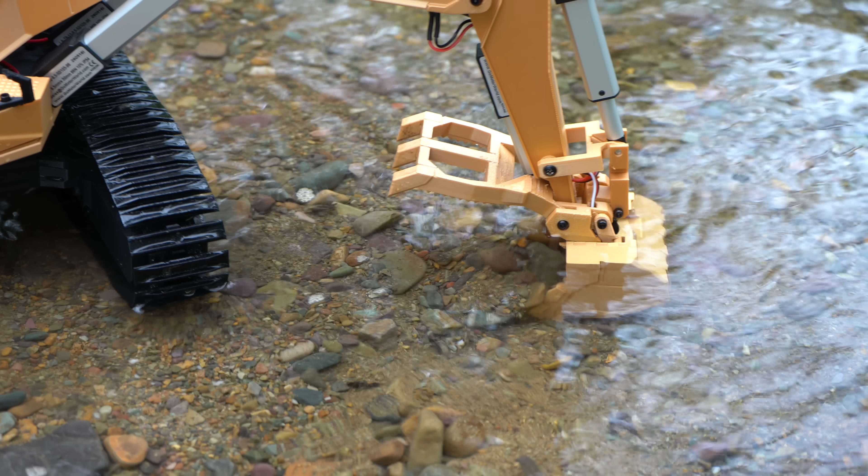This is a 3D printed RC excavator, and not only can it dredge up rocks out of the creek behind your house, load your nephew's dump truck, or construct this perfect Jenga block tower, but most impressive of all is that it can entertain 3 fully grown men for hours on end.

A big part of that, and what makes this excavator so unique, is that it doesn't just have a bucket, which by itself pretty much only lets you scoop up loose material. Instead, it also has a fully independent thumb, which unlocks the ability to pick anything and everything up. If that's not enough, you can automatically detach from the bucket and reattach to this ripper completely hands-free.

Even better is that those attachments can have their own motors and functions, like this claw, which after being coupled to can spin and clamp.

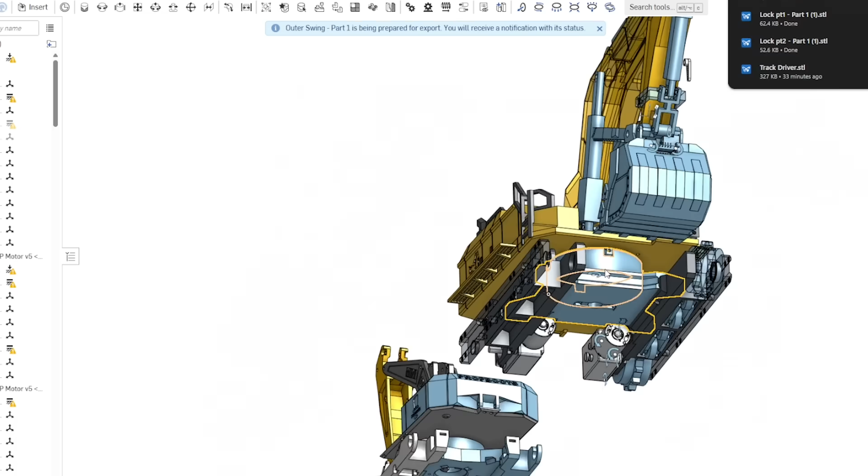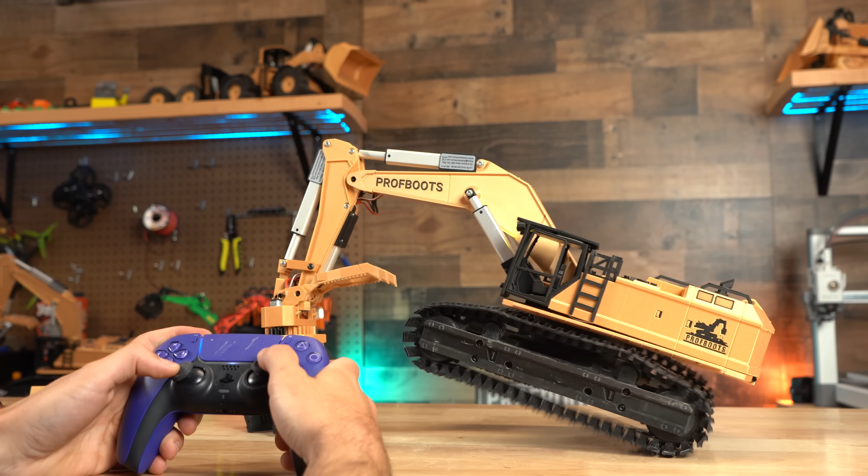Now, I've spent months designing and iterating this to be as robust as possible, with the hope of making the ultimate beach toy for my family. But what really separates this project is that for the first time on this channel, not only is there a robotic style version controlled by a PlayStation or Xbox controller, but also one that can be built and controlled with traditional RC parts.

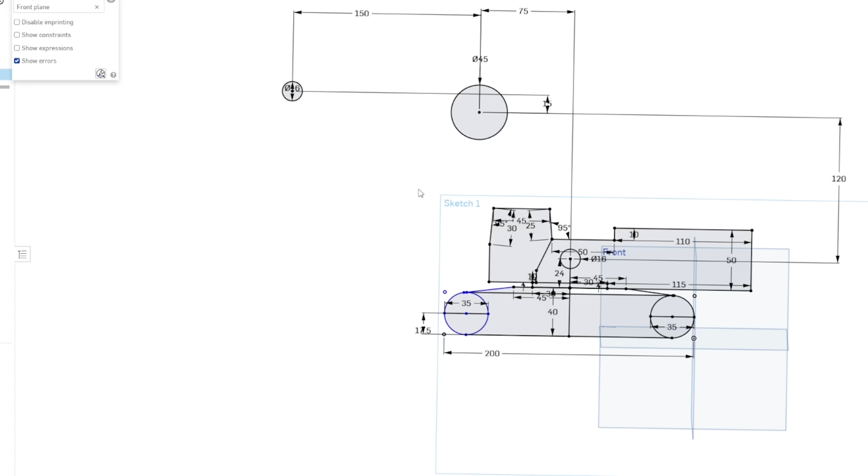Kicking this project off, I laid down a 2D sketch of what I want this excavator to look like. Usually, I really take my time during this step, sometimes stretching it out over 2 to 3 days, but for this case, I had a pretty good idea in mind on what I wanted this to look like. Basically, just a large mining class excavator like the Cat 395 or Komatsu PC 900.

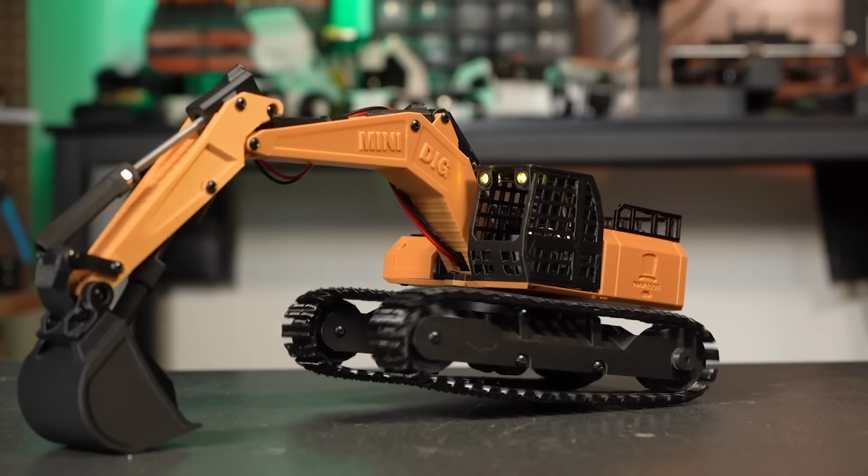The reason for these references is, let's say my original RC excavator was around the size of a Cat 320, well, I want this new one to be much heavier duty, which to me places it right in that Cat 395 spot. The reason I chose a bigger excavator for the next project is because I wanted one that could be used outside in the sand and dirt.

Now don't get me wrong, you can use this smaller excavator outside, but I really only designed it for indoor desk use. Driving it in the sand will eat away at the N20 motors as they're all completely exposed to the elements. This leads me to requirement number 1 for this project: all of the motors need to be completely enclosed so as to not let any dirt or grime in.

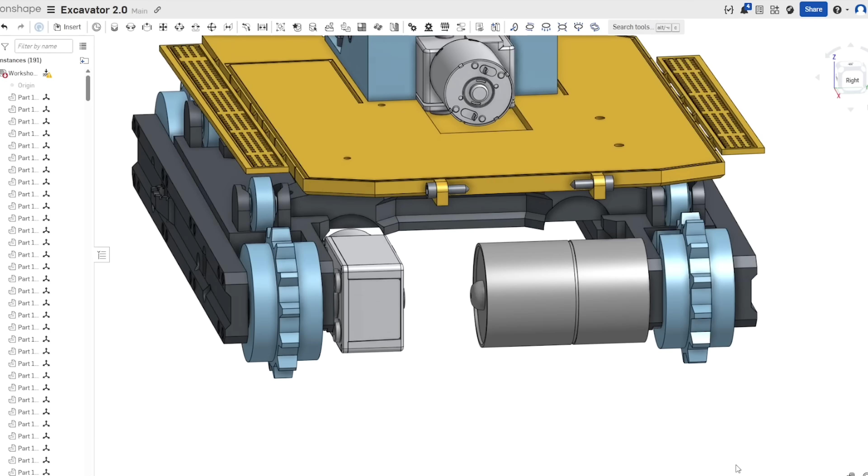For the tracks, I've decided to go with these 12-volt right angle motors as I did a bunch of virtual testing, and while the motors I used in the dozer are more efficient, the diameter is just a bit too large to feasibly fit in the tracks. They just stick out way too far.

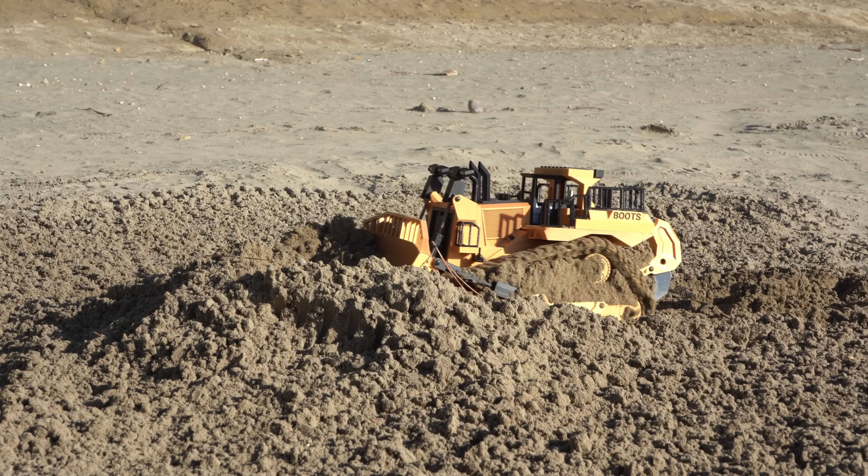These will still provide more than enough power for the excavator, as most of its utility comes from the arm versus the dozer, where literally all of its utility is being able to push and move heavy things via the track motors.

After nudging and pulling at all the different proportions of the original sketch, I finally got it to a place I was happy with. So I cloned that one sketch a half dozen times, separating it out into all of its core components, such as the body, cab, boom, dipper, etc.

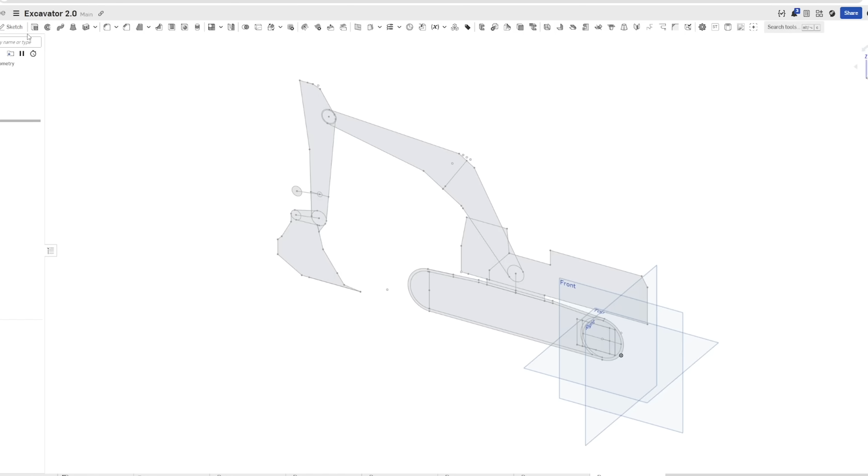I found that just jumping to this extrusion step early on really helps me tune out any weird proportions that might mess me up later. It also lets you mock up all the motors and push rods immediately so that you can verify everything has room to actually be mounted.

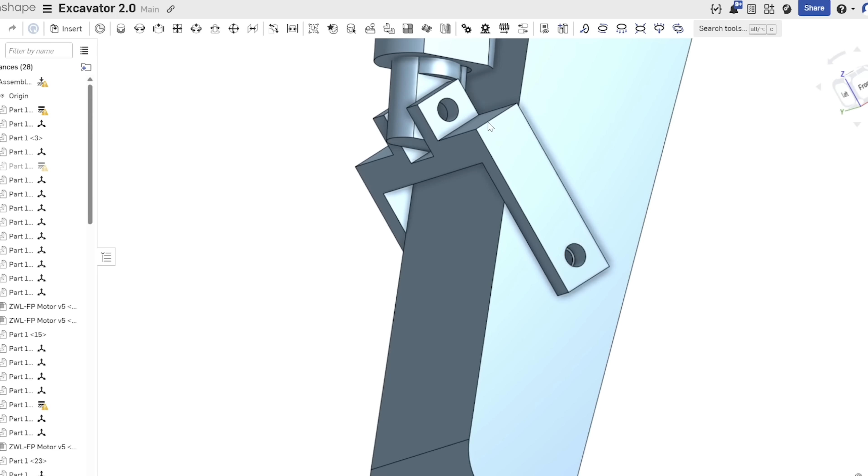At this stage, I did find myself getting a little overwhelmed, as with an excavator, there's just so many moving parts and sub-assemblies. But for the sake of progress, I narrowed my vision and just focused on the carriage, which lets the top half of the excavator rotate independently from the tracks.

I went with a ring gear design on the lower carriage that can be spun via this pinion gear mounted to a motor on the lower body.

This massive 80mm bearing bridges the gap between the two pieces and will seal out any dust and debris. One huge benefit of building this model bigger is that it gives me more room to incorporate these bearings, which just makes the model so much more efficient and durable.

For instance, moving onto the track and track supports, every roller that contacts the track is supported on a bearing, which without even testing anything, I know will make a huge difference versus the older excavator where it's just plastic on plastic.

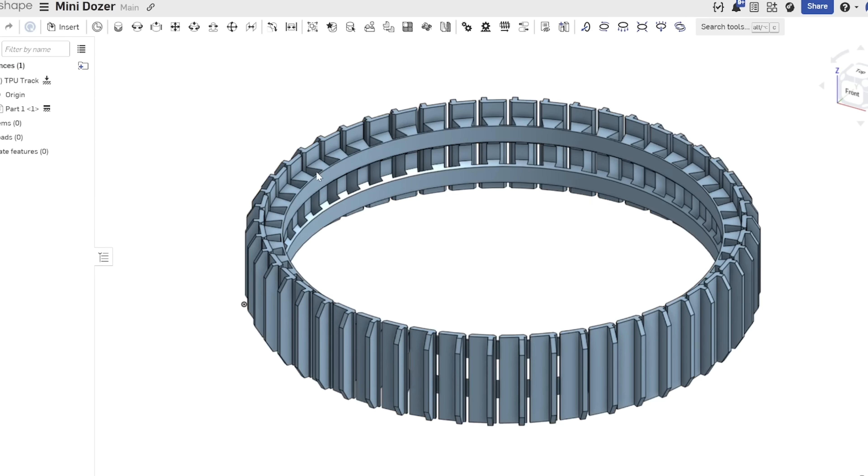That's a lot of friction. I was able to cheat a little bit on the track as I knew I wanted to use a design similar to the one I made for the dozer, since I've already invested a ton of time optimizing it to run smoothly, as well as purge debris that makes its way into the tracks.

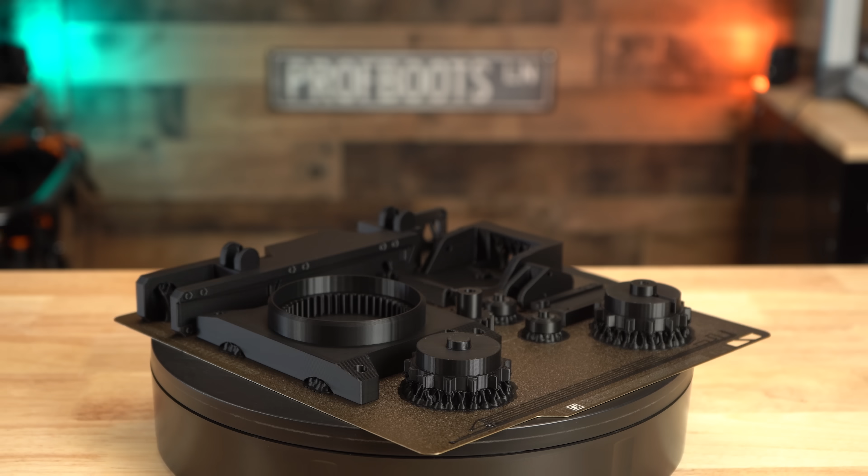Before officially starting any of the printing though, I wanted to add detail to the cab, body, and arm. Looking at this from the assembly point of view, I'm starting to get that heavy duty look I was hoping for. The first round of prints for the track assembly came out great.

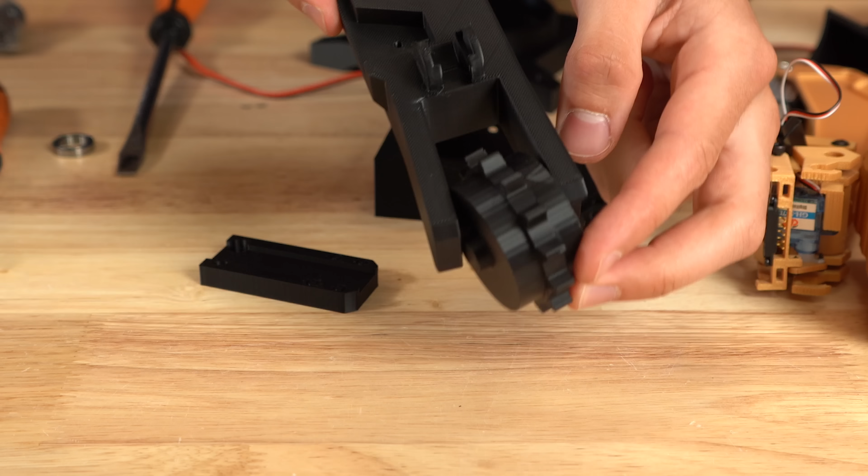But almost immediately I started having fitment issues, like the cutouts for these bearings being a little bit too loose, and the slot to fit the track rollers in not being flexible enough to allow the rollers to pop into place. Not sure why I thought they'd be able to flex that much, but ultimately I split the entire support into two pieces that hold all of the bearings while sandwiching the rollers in place.

The secondary idlers that pivot back and forth proved to be a bit of a pain, but ultimately I ended up modifying the design so that every roller only uses one bearing instead of two. This way you only need to buy one pack of 20 versus two packs of 20.

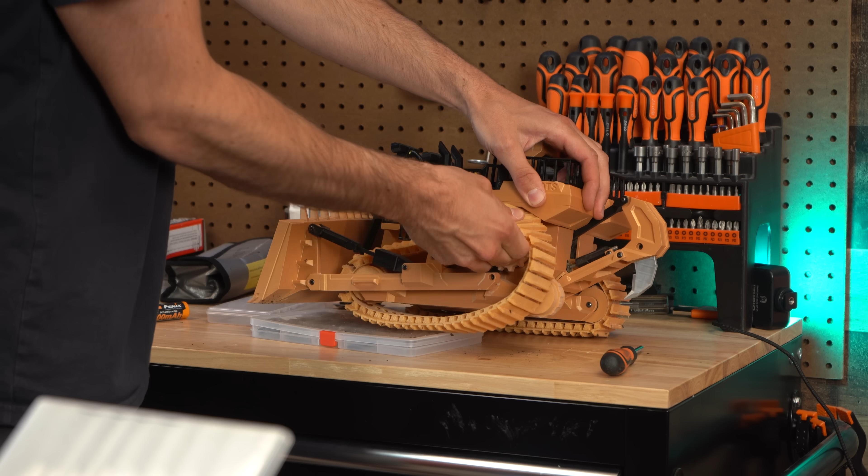Before committing to really printing off a TPU track, which takes over 7 hours, I first robbed the dozer of its track to see just how close it was to fitting on this model. Unfortunately, it was on the smaller side.

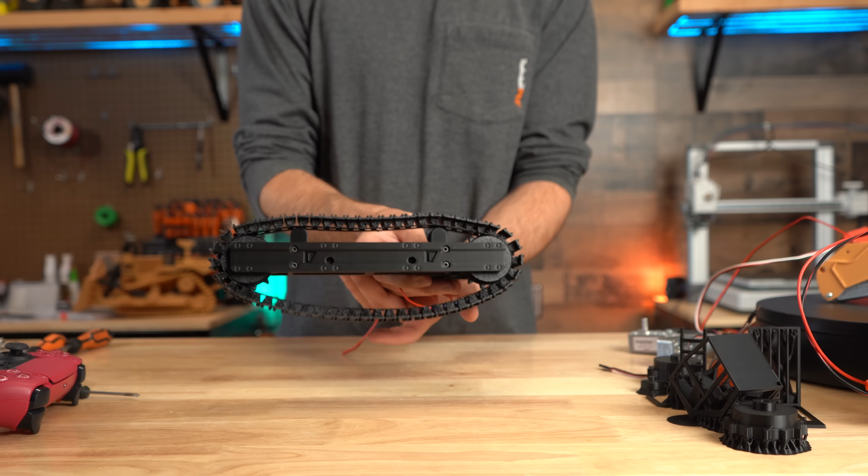So for the first track iteration, I leaned on the side of too big, and wouldn't you know it, it was indeed much too big. But it was still cool to assemble everything and see it get to move under its own power for the first time. The second track came out too small, but the third fit perfectly.

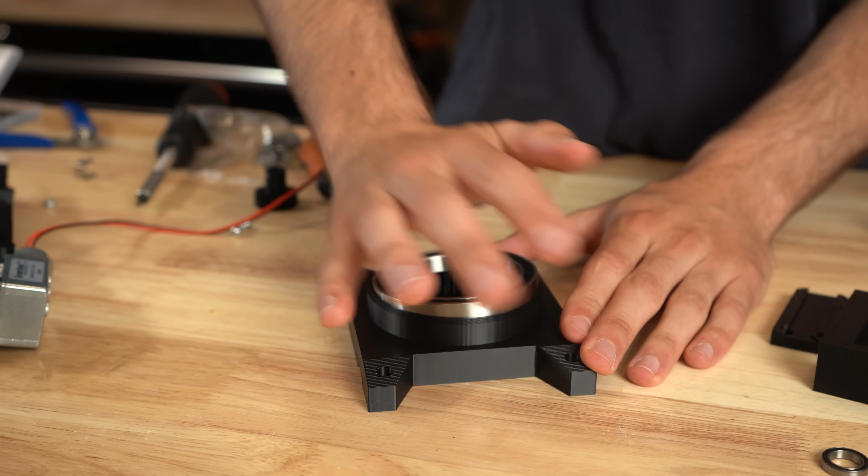Pressing the 80mm bearing into place took a good amount of force, but after testing how much leverage it takes to pry it up out of place, I think I'm going to incorporate some kind of system where screws can be threaded in to really lock it into place.

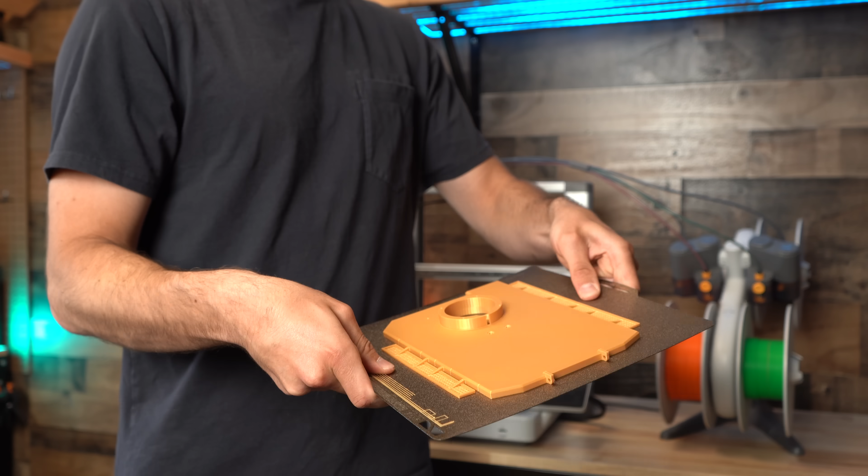After pulling the lower body off the printer, I swapped the bearing over and pressed the two halves together, which gave me a good idea on how this is all going to work. This was also my first time really seeing just how much bigger this excavator is going to be than its predecessor.

The carriage rotation is powered by a right angle motor, same as what's going in the tracks. To transmit power from the upper half, where all the motor controllers and batteries are, down to the track motors, I'll be using this 6-wire slip ring.

The beauty of this is that you'll be able to indefinitely spin the two halves separately without ever tangling any wires or hitting a hard stop, like what's common with a lot of RC excavators. At least until the cab unscrews.

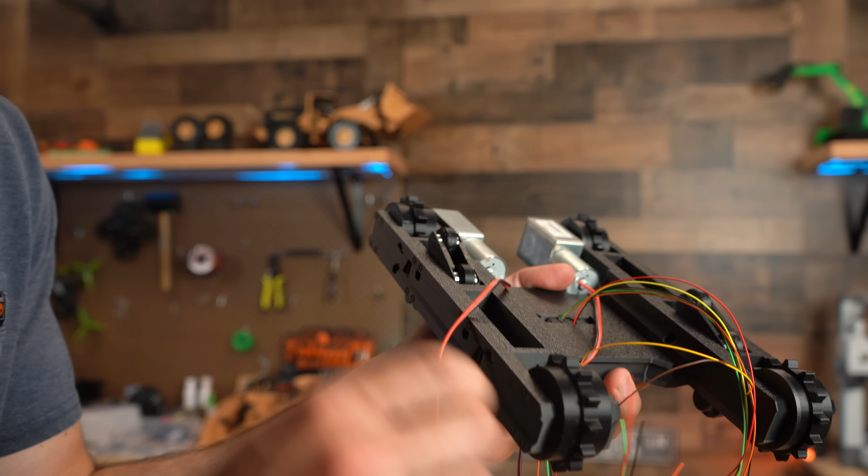With the tracks and track supports now having been iterated at least a couple of times each, it's finally time to solder the motors into place and take it for its first crawl. This is essentially my child taking its first steps out into the world.

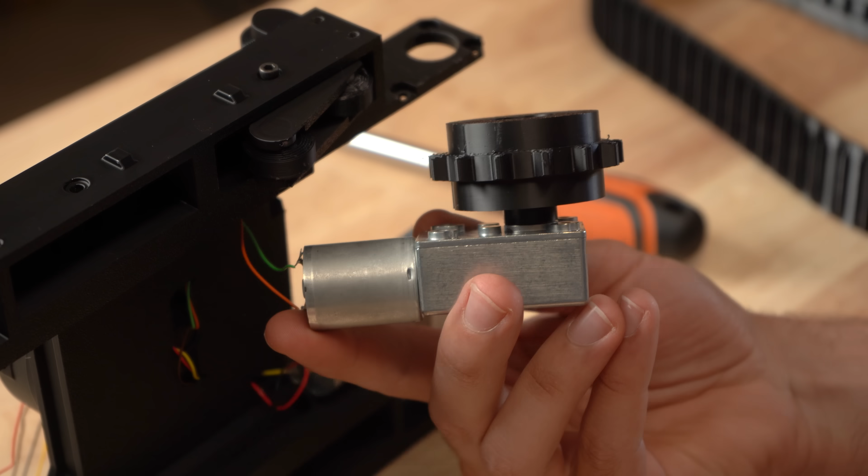Everything functioned perfectly except for the fact that my track drivers have this severe wobble, which, after pulling it apart and looking at it, these flat spots to lock the motor shafts in place were digging in too far, which, when pressed onto the motor, would cause them to bend off to one side.

I ultimately just removed the flat spots and doubled down on the grub screws being what keeps it all locked together. And after some testing, it was a successful solution.

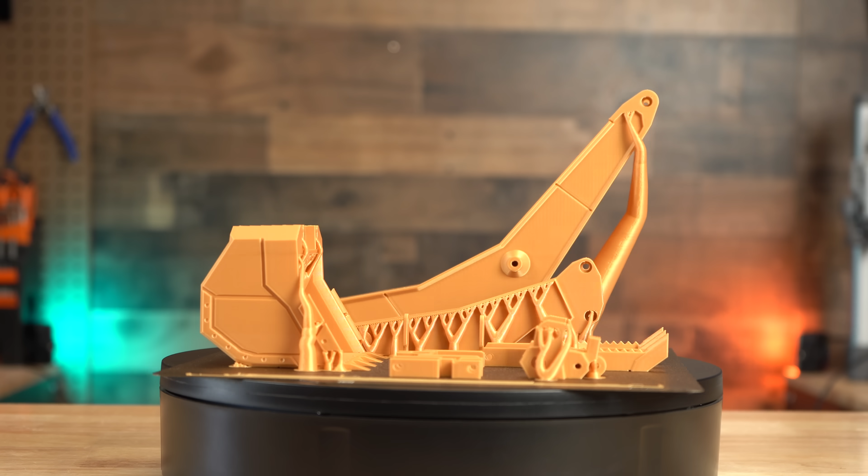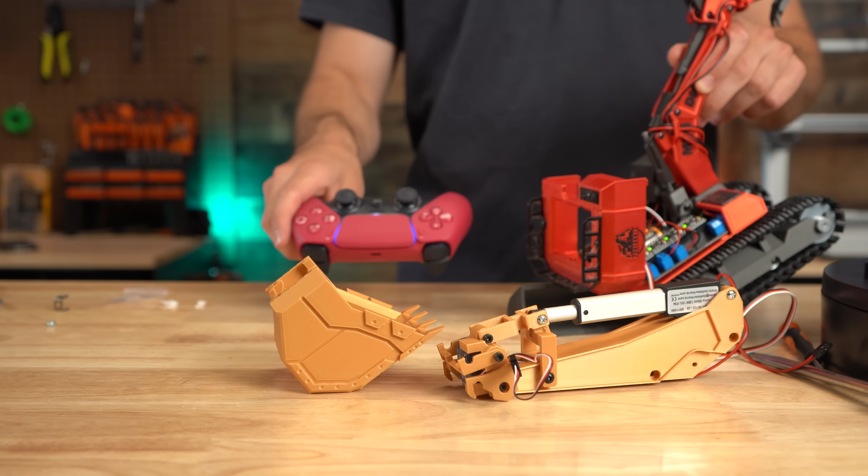Printing off the arm did make me laugh a little, just looking at the bucket of the OG excavator versus this new one really puts it into perspective on just how many more beans you'll be able to scoop. This thing is gonna have some serious scoopage power.

But as you might notice, it's not connected to the dipper. I may have gotten carried away and just jumped straight to designing and printing the automatic coupler. I also failed to film any of the assembly, but here it is all together. Because I haven't wired up the new electronics yet, I'm just piggybacking the one servo off of my old excavator board for the time being.

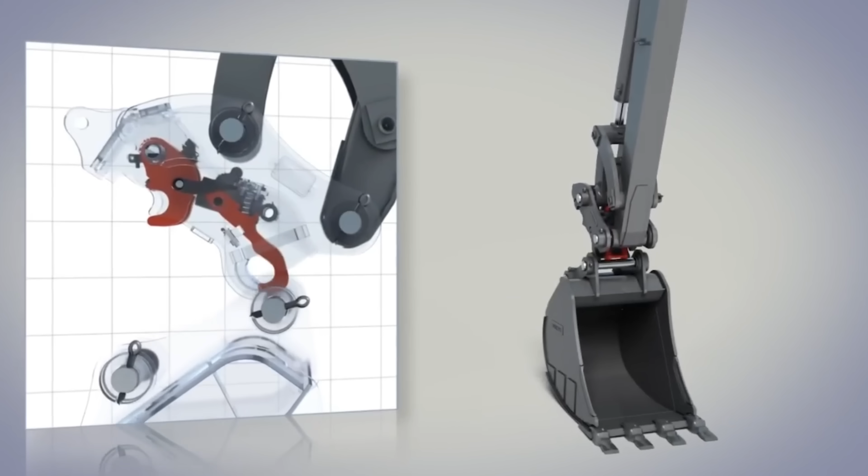If you've never seen an excavator in real life with an auto coupler, basically how it works is it hooks into the attachment on the front, tilts it back, and then swings out another hook that catches a bar, and voila, your attachment is locked in place. That's pretty much exactly how I designed mine to work, except with one small modification: this magnetic strip.

At first, I was planning on using two of these 2-pin circular magnets that would shoot out to the side, kind of similar to what I did on the wheel loader, but then I realized the linkage coming off the servo to make this happen would take up a lot of space. It's far simpler to just place the magnet on the coupling bar itself, which can then just swing up and contact a receiving magnet on the attachment, if it has one.

Here, I'm just coupling to the bucket, which of course has no powered functions, so no magnet is required. This being the first iteration of this design, it was of course absolute trash. While it did lock into the bucket, the bucket itself was super loose. Then, even more egregious was the fact that when you try to uncouple, there's nothing holding the front hooks in place, so there's a 50-50 chance that instead of the rear hook coming forward, the front hook will come back. This is only made much worse when there's a magnet holding it forward.

I fixed this by just making this little notch/shelf so that after hooking into the bucket, you tilt it all the way in so that it rests like this. Then when uncoupling, the rear is forced to slide forward, making the magnet uncouple.

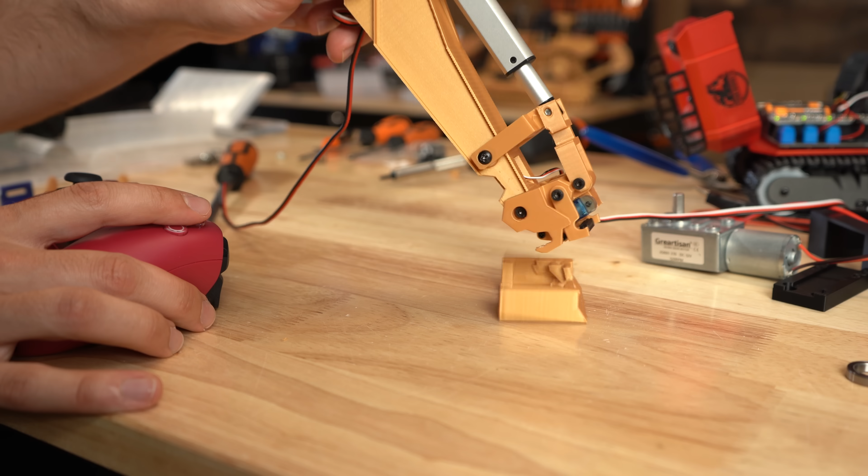Now that I've scratched the mechanism itch, I tested the curl function, which, other than some parts needing to be clearanced and the motor itself needing to be about twice as fast, it worked decently well. But before printing the rest of the arm, I decided to print out some more of the body and accent pieces, so that I could get a better feel as to how this is all going to look.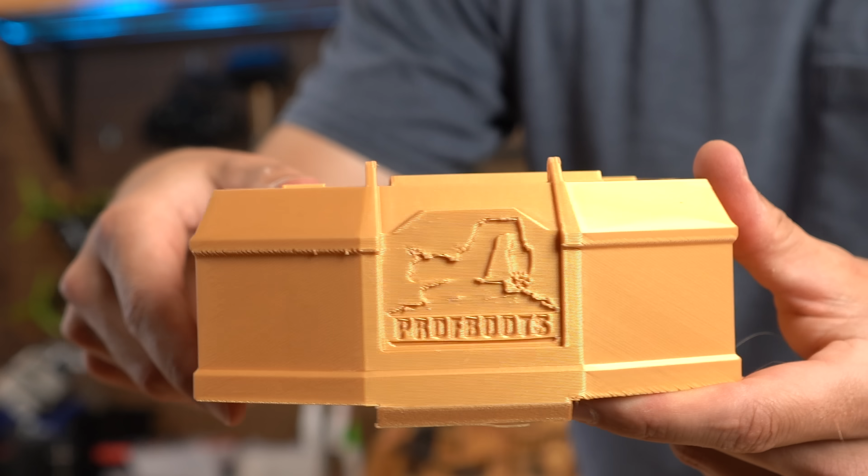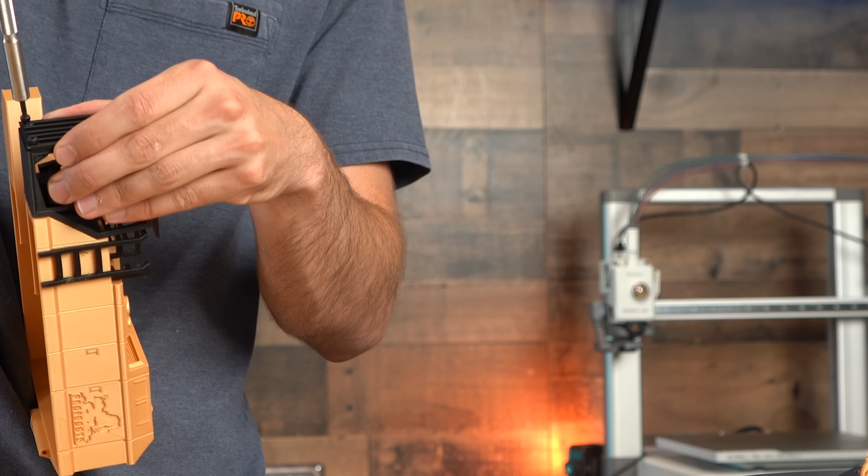The body came out great. There's a little bit of overhang gunk on the rear hatch logo, but I'm not sure it's bad enough to justify printing a separate piece and slotting it into place. The cab and ladders all get mounted with one screw each, and then the cab receives this, in my opinion, sick cab cage. To me, this really just makes it look a little more heavy duty or Mad Max-like.

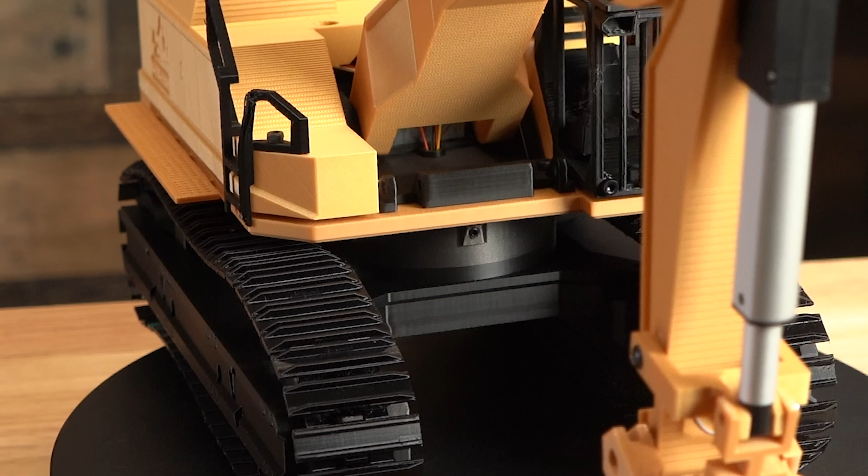The only logical thing to do at this point was assemble everything together. Stand back and admire a month of hard work. Side by side, you can really see just how much bigger this thing is. Which, one thing I'm particularly excited about is just how much higher the boom will be able to reach.

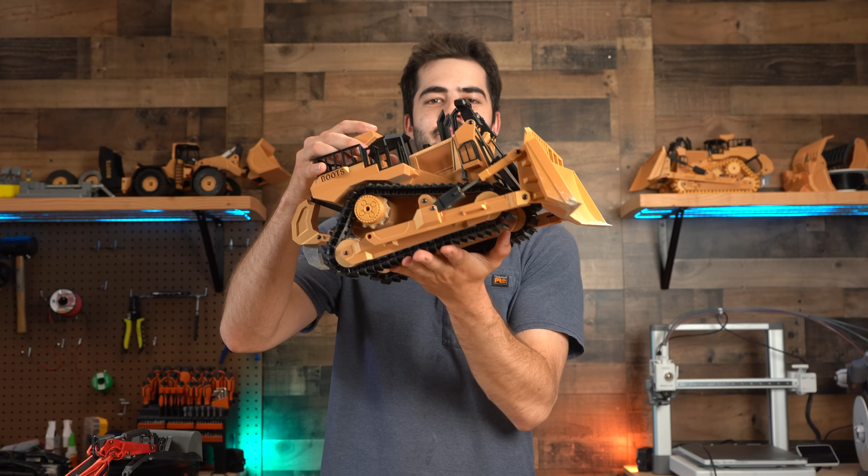I received positive feedback on the physical latch I used in the dozer. A really common occurrence is for someone to want to pick the model up and look at it, which makes sense. Well, when it's only small tabs holding the rear hatch on, and that's where they grab, it just pulls apart, leaving you in an awkward situation. These physical latches, though, give you a bit more peace of mind if someone comes and picks your model up.

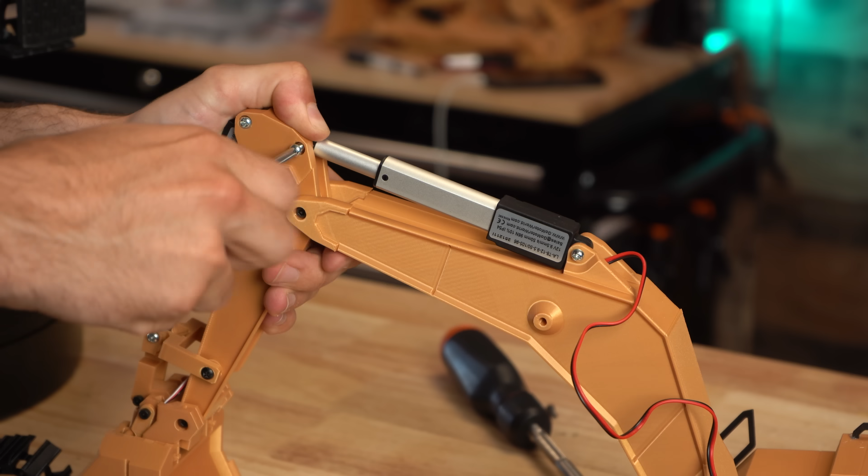I did some basic tests with the dipper motor to see how much weight it could push, and what I'm really looking for here is if it can do a full body push-up, for parkour reasons. It did do it, but I have a feeling there might be a bit of a struggle once the rest of the model is in place, so I may need to decrease the gearing on this motor to get a little bit more torque out of it.

For the electronics on this excavator, I started by figuring out how many motor outputs I needed. Figure 2 for the tracks, 1 for the carriage, and 4 for the arm. That covers all the essential motions, including the thumb, putting us at a total of 7.

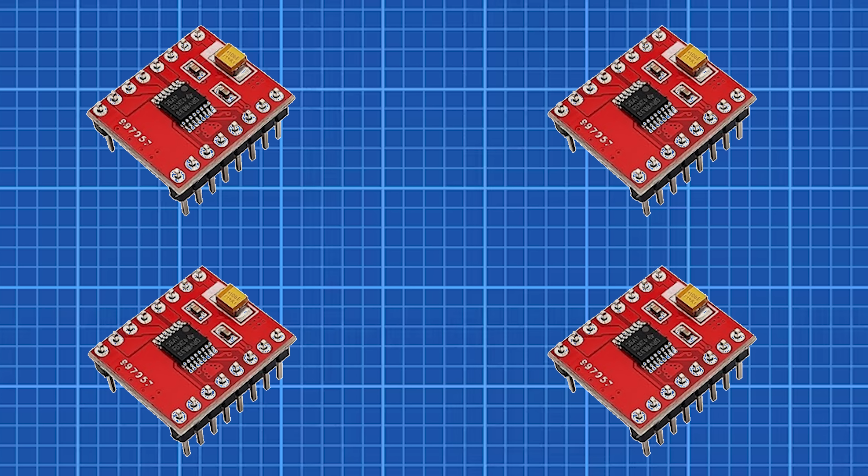With 4 of these dual bridge H-bridges, that gives us 8 motor outputs, meaning we'd have 1 spare. Preferably, I'd like to have at least 2 spare motor functions, so I added another H-bridge, giving us a total of 10 motor outputs or 3 spare motor outputs.

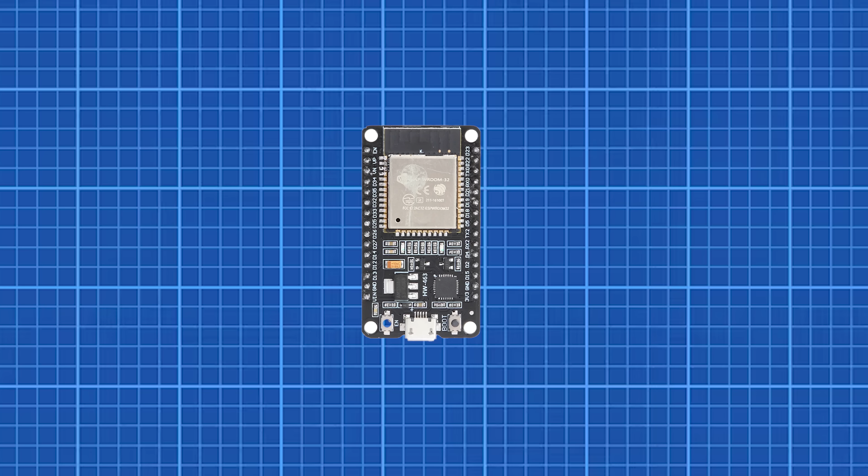Now, controlling all 10 of those motor outputs is where things get tricky. One ESP32 development board, which is what I use as the brain for all of these projects and is what connects to this PlayStation controller, only has enough outputs to reasonably control 5 to 6 motor outputs. There's multiple different ways to solve this.

For instance, on the original excavator, which has 8 outputs, I used this MCP23017 port expander, which basically just lets you route in a couple pins from the ESP32 that can then be used to control 16 outputs and inputs, depending on the signals you're sending to it.

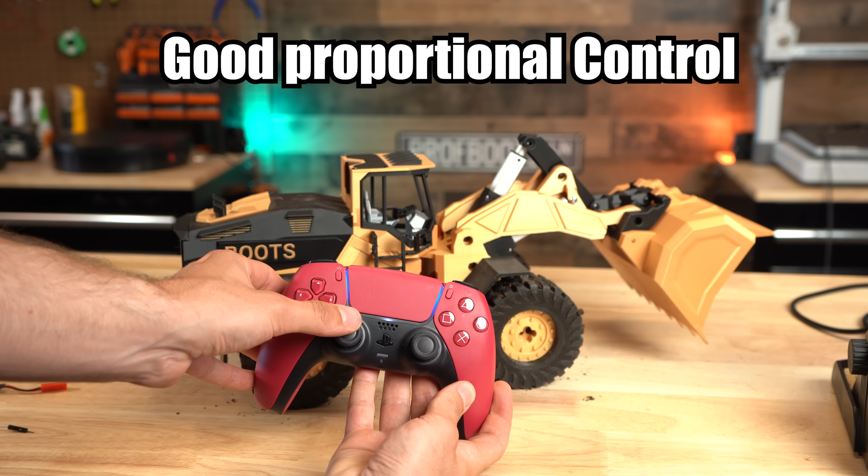There's 2 problems with this approach. The first is that proportional control is much harder, if not impossible, to achieve, as you can really only send on and off signals to the motors via that expander. So it's really only all or nothing for motor movement. Because this model is so much bigger, I would like to have finer control.

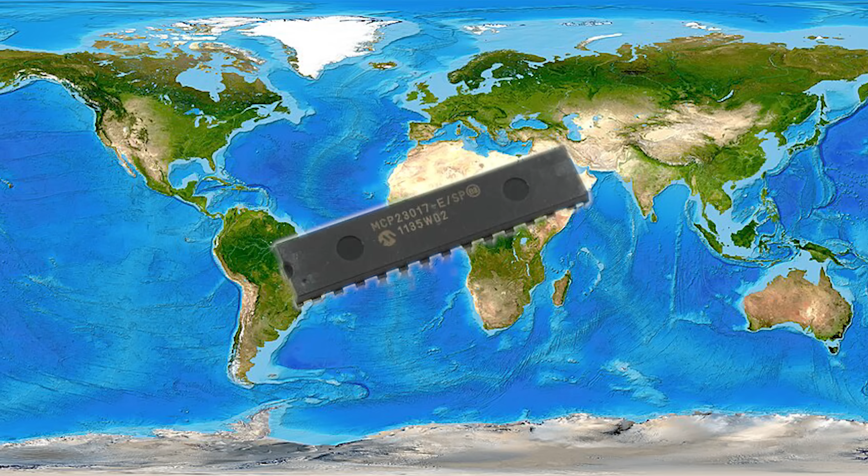The second reason I don't want to use this port expander is the cost. The ones I usually get are about $10 a pop, not terrible, but not great. In other countries, like Australia, I've had people who can only find ones for $30 to $40, or they just can't find them at all. Because of this, it's for sure a no-go.

Oh, and I guess there's also the fact you have to solder in these resistors to make it work, and while not a total deal breaker, I won't miss having that extra step.

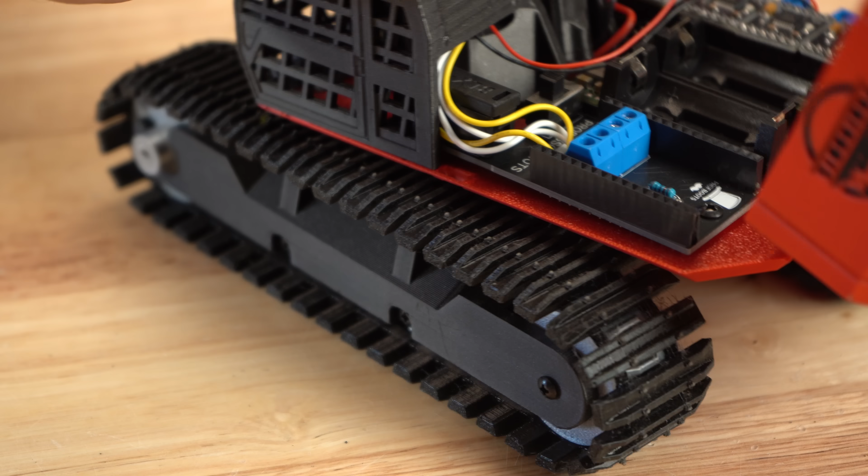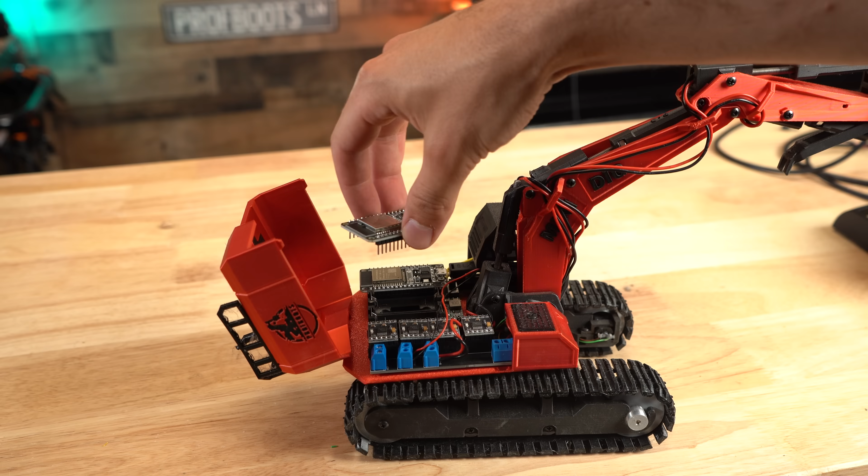My alternative is simple. I'm just going to add another ESP32. I know for a fact you can get these absolutely everywhere for only about $5 US a piece. The reason I didn't do this on the original excavator was space constraints - there was no way to fit another ESP32 inside the rear hatch. This bigger excavator, though, should have plenty of space.

The final key to the electronics is this buck converter, which will take the 12 volts coming from the batteries and drop it down to a lower voltage for the ESP32 and servos.

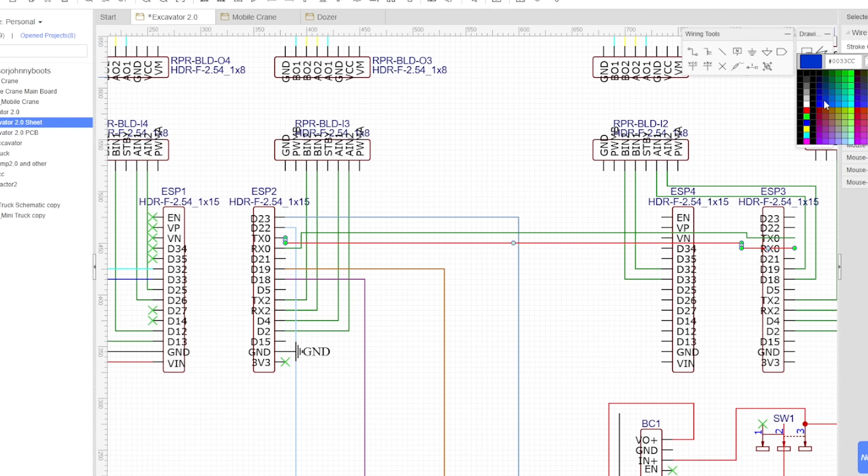With all of that figured out, I hopped into my PCB designer and laid out all the pieces, followed by making all the connections. With everything connected, I started building the actual circuit board itself.

If this looks really complicated, don't worry, it's really not. I'm basically just playing connect the dots, with the real challenge being to make everything as neat as possible.

Once satisfied, I absolutely slammed the order now button, and 4 days later, I got the boards.

The reason for this board versus just wiring everything together physically is, well, there's about 100 different connections that need to happen. Soldering a harness for all of those would be terrible. I wouldn't wish that on my worst enemy.

This, on the other hand, makes everything super neat and tidy. You just solder the headers and terminal blocks on from one side, then that lets you plug everything into place.

Before installing this PCB though, I figured it might actually be a good idea to finish getting the excavator ready to receive it, starting with the arm motors, which upon testing had enough power to rip the threads out of the lower chassis. Definitely going to add some more mounting slots for those. But for now, a little hot glue is gonna have to hold it.

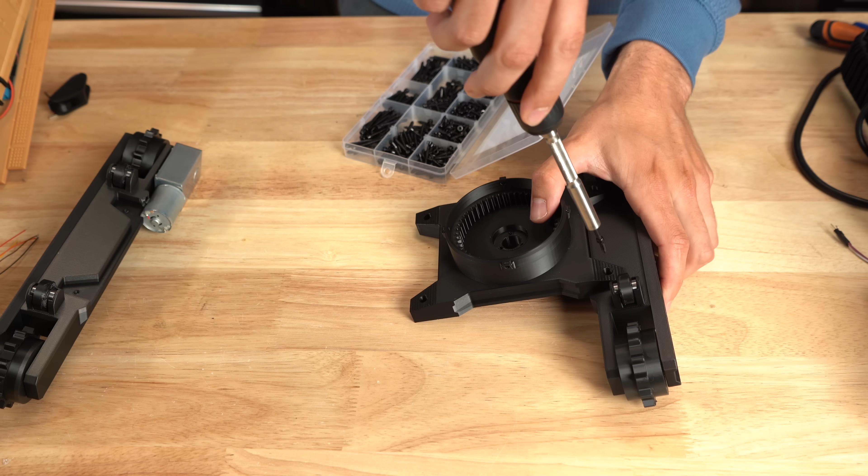I swapped out the carriage to be a bit wider and give the model more overall stance. Can't be having an excavator that skips leg day.

Finally, I soldered on 2 runs of wire to the motor just so I don't have to blow this whole thing apart later to do it.

To power this beast, I've got 3 of these Phoenix 18650 2600 milliamp batteries.

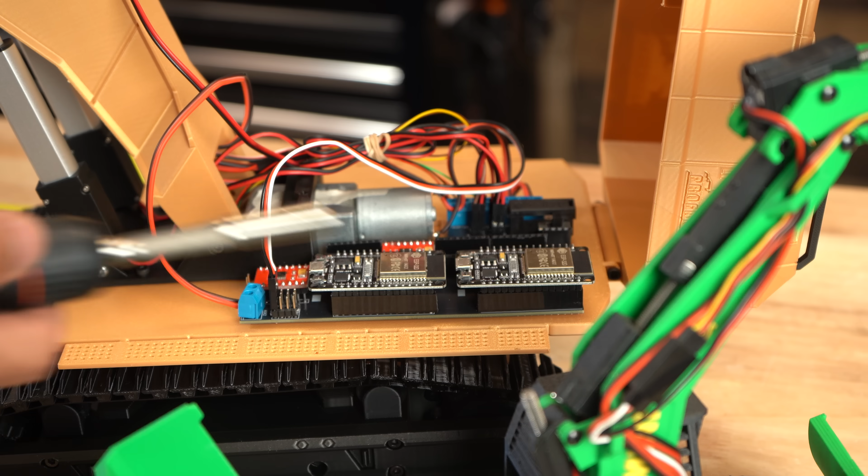You could absolutely just use a traditional 3S LiPo battery for this, but given this is more like a robotics project where people are learning and potentially soldering things for the first time, I much prefer these batteries as they have overcurrent protection, meaning you can short circuit something and not have to worry about damaging the battery. It instead just shuts off until the model is restarted.

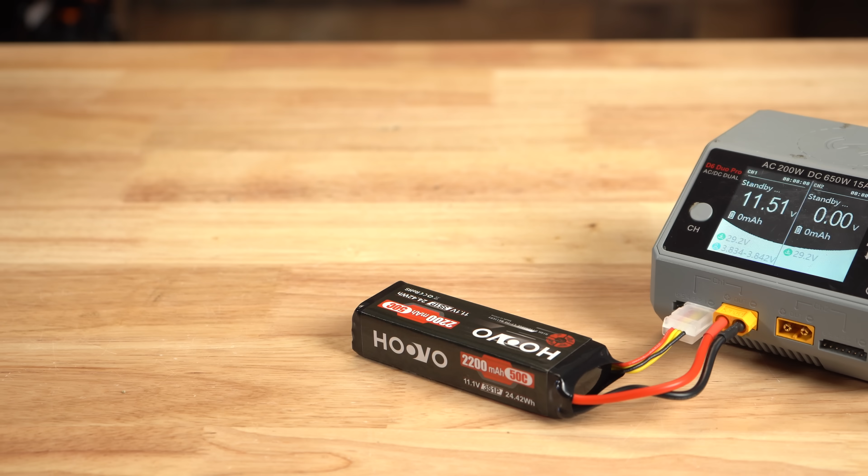Also, instead of having to have a whole charger setup like a traditional RC car battery, you can instead just use the micro USB that's directly built in.

Fenix, if you ever watch this video, I want you to know I've directly promoted your business to millions of people and never received a dime. So maybe think about sending me a headlamp or something.

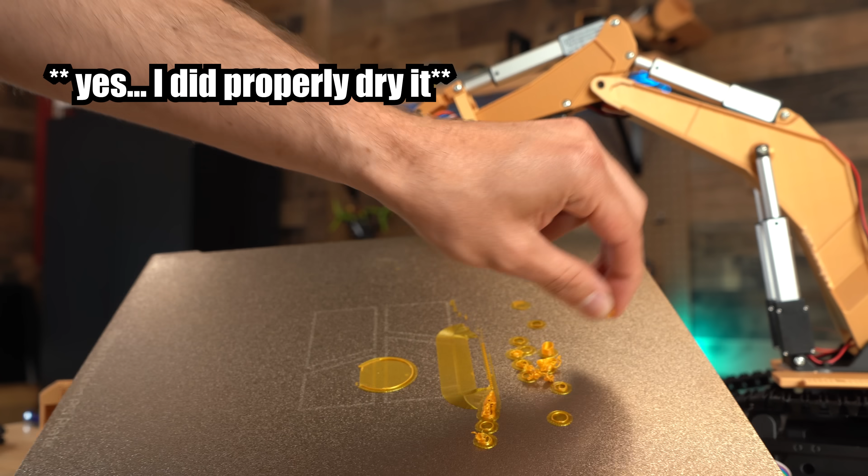Speaking of promoting though, I did buy this roll of PETG from Overture, and guys, I don't know what happened, but never have I come across a roll of filament that had such weak layer adhesion to itself, but fantastic adhesion to my build plate. Bad, Overture, bad. Anyways, back to more pressing matters.

The 3 Fenix batteries get pressed into this 3D printed battery holder. Powering on the excavator, you wouldn't believe it, absolutely nothing happened.

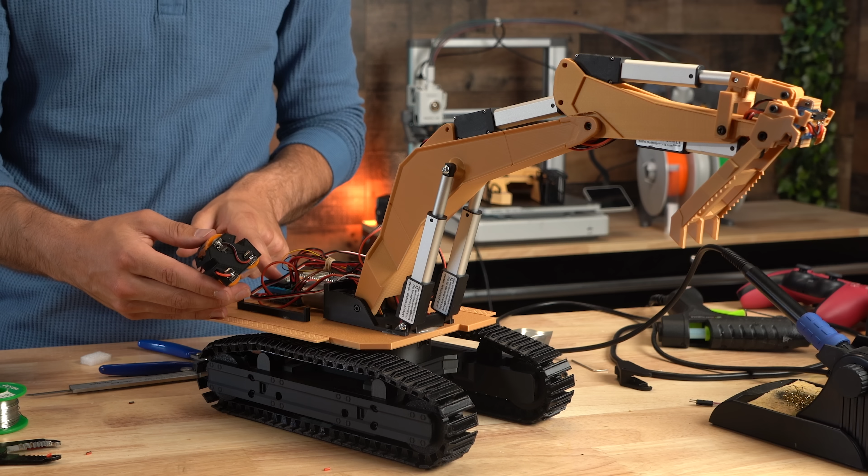At first, I wasn't worried, as usually I'll forget to put in the fuse, or maybe one of the batteries is dead. But after running through my initial checklist of likely culprits, I still had no life from the ESP32s. Ultimately, I found out that this entire row of headers for the H-bridges were backwards, meaning I had shorts on every single one of them.

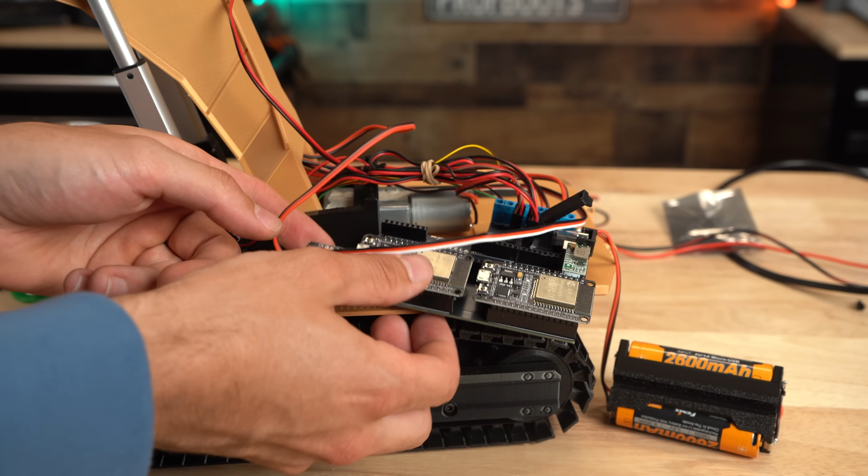Once I removed the H-bridges, my ESP32s started getting power. This really sucked because I was super pumped to finally get this thing moving under its own power, and it was going to take another 3 to 7 days to get the fixed batch of boards in.

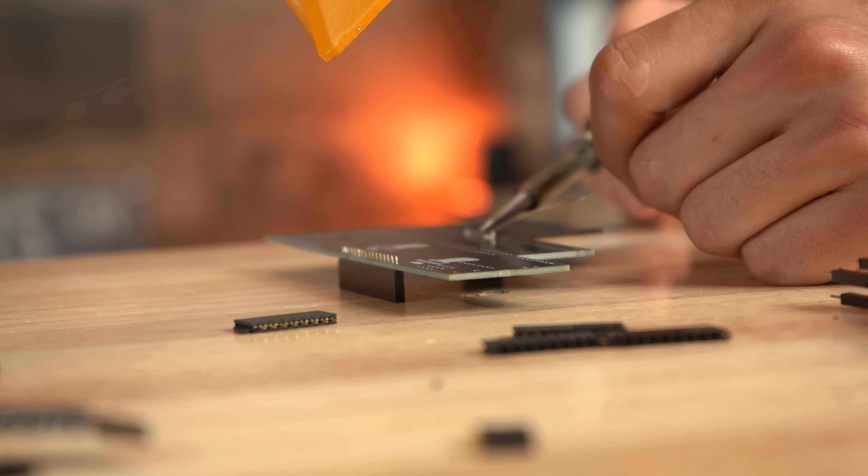Ultimately, I banged my head off the wall a couple times and then decided to spend a day soldering a new circuit board, but with these twisted ribbons that flip the connection for each H-bridge. After verifying this Frankenstein PCB was receiving power, the final thing to do was write the code for the excavator.

I'll save you the boring bits, but basically the important thing to know is one ESP32 acts as the primary board, communicating with the PlayStation controller and handling a couple of the motor commands. Any motor it's not in control of, it simply tells the second ESP32 via the RxTX signal what motor needs to be moved and how fast to move it. Uploading the 2 different code versions, I finally had a model that moved.

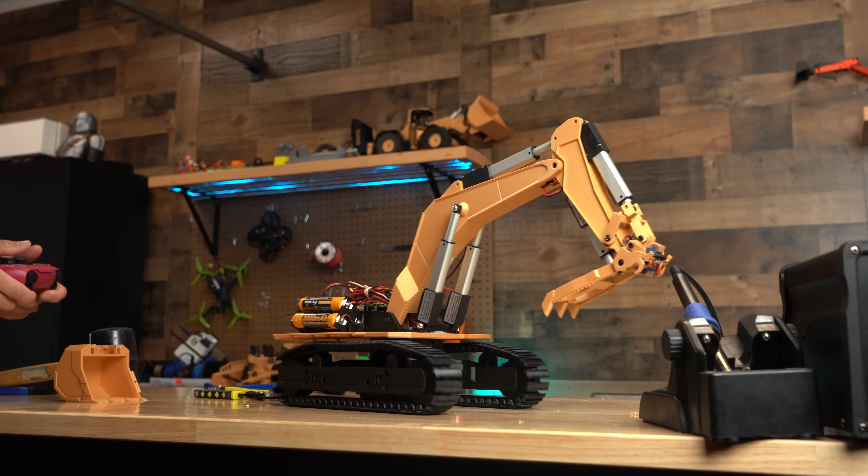For the control layout, I placed all of the arm functions on the joysticks and set it up to mirror ISO controls. Basically, if you were to drive an excavator in real life, the joystick controls would mirror these joystick controls, and I think that's pretty cool. So if you're a heavy equipment teaching institution, hit me up. The tracks I set to the bumpers and triggers.

To really break this thing in, I of course did a couple hot laps on my floor, messing with anything that came into reach, like this box. But what I was actually itching to try is coupling into an attachment, which went a little something like this.

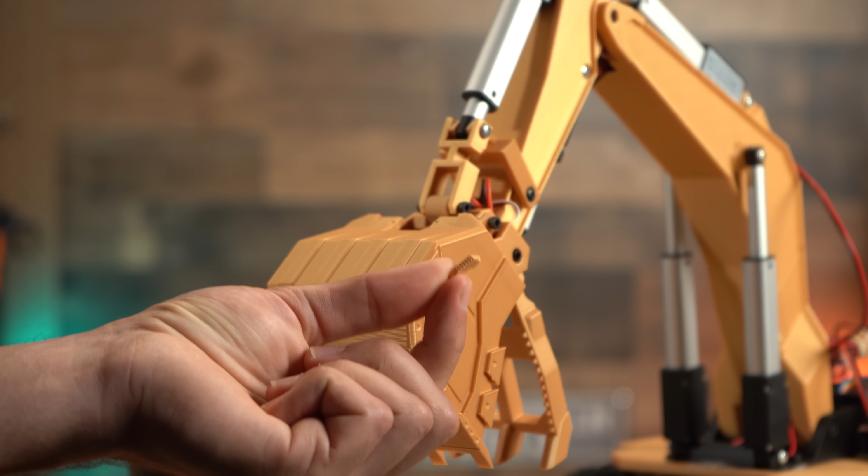I have more than enough power to squeeze it, but once I let go of the control, the thumb back drives, loosening its grip. I did try and do a full power squeeze, which resulted in this - a broken coupler plate. That's going to need some reinforcing.

Which actually leads me into the next thing I want to tackle for this model, a functional rotating claw attachment. The OG excavator with its claw is by far one of my favorite machines to operate, as you can really construct some awesome towers out of anything with it.

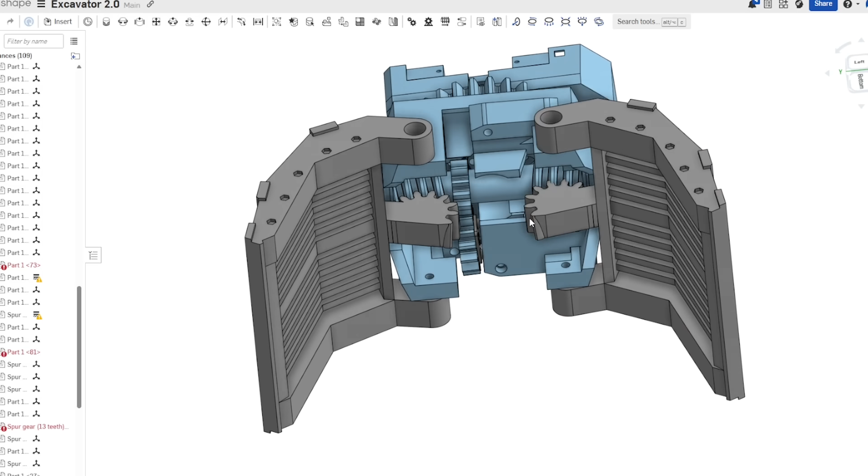My hope is to recreate a similar feeling here, but what will be cool with this is you'll be able to retain the thumb function if you so choose. I came up with this worm gear style claw where the two sides mesh into a worm gear that's spun by an N20 motor. While it was really fun to design, I just couldn't get it to work super well.

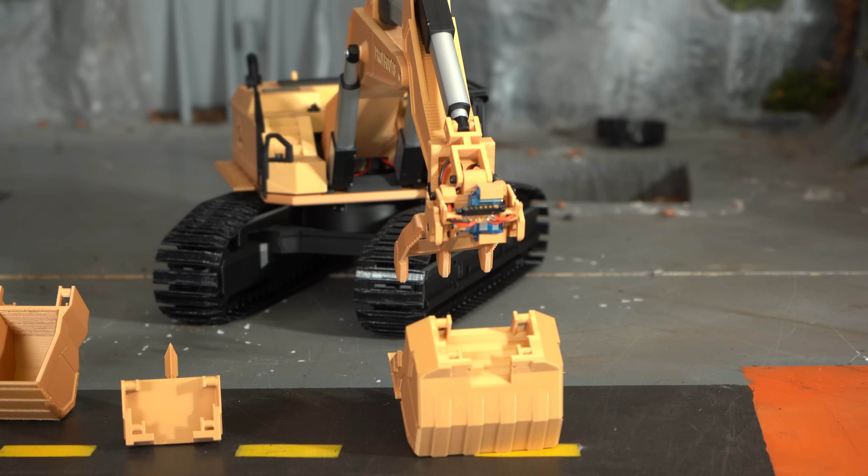This gold black iteration was my third attempt, and honestly, at this point, I was pretty sick of it, so I just said to heck with it and designed this trenching bucket instead, as well as this ripper for breaking up material. With those done, I moved everything to my display table so I could really put it to the test.

I started by hooking into the large bucket first, and then without skipping a beat, I beelined it straight for the mountain. This is usually the first proving ground for all of my projects, and unfortunately, over time, a lot of the grippy material has gotten torn away, hence the tracks slipping here. But luckily for the excavator, I was able to just drag myself up the hill using the arm.

Navigating all the lumps and trees was definitely its own challenge with this large of a model, and the tree population, hate to say it, took a hit from this venture. The bridge was a good test on stability, and I'm honestly just shocked that these little posts managed to stay stuck in the mountain, as they're just held in with a little bit of hot glue.

I'm telling you, having this arm turns this into the ultimate off-roading machine. If you can't climb it, you can instead just do a one-arm push-up over it.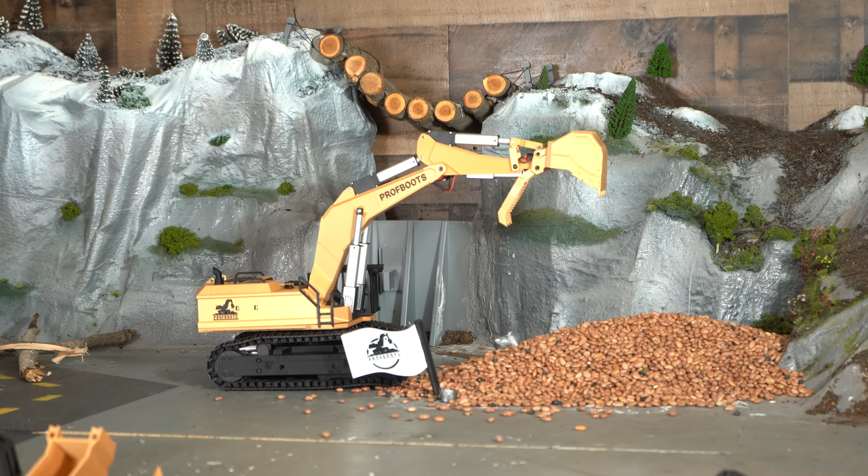I did decide to pass on driving it back down, as I had already done enough damage to my mountain. In the last video, I cleaned up all the beans and swapped it out for dirt because it was for a tractor. But now that I finished that, I'm definitely throwing the beans back on the table. And let me tell you, these first couple scoops are like your first sips of coffee in the morning. Life inspiring.

I also checked that the track would purge any debris that made its way in by mashing the tracks through the beans, and while it did pick up a lot of them, it didn't take long for them all to get purged out, which is exactly what I was looking for.

Filling up this side dump was something I had in mind when building this project. The original excavator was just not to the right scale in order to fill it up in any reasonable amount of time. Seriously, it would probably take 20 minutes to fill it all the way up. The wheel loader was a game changer for this, but I'd still like the excavator to be able to do the job as well, which it absolutely does.

As a bonus, if your truck driver parks too close to you, or maybe they just ate your lunch yesterday, you can literally pick up the entire side dump and give them the ride of their life. For those of you wondering, it takes about 8 scoops to fill the side dump up, and I definitely think there's room to make a bigger bean scooper in the future.

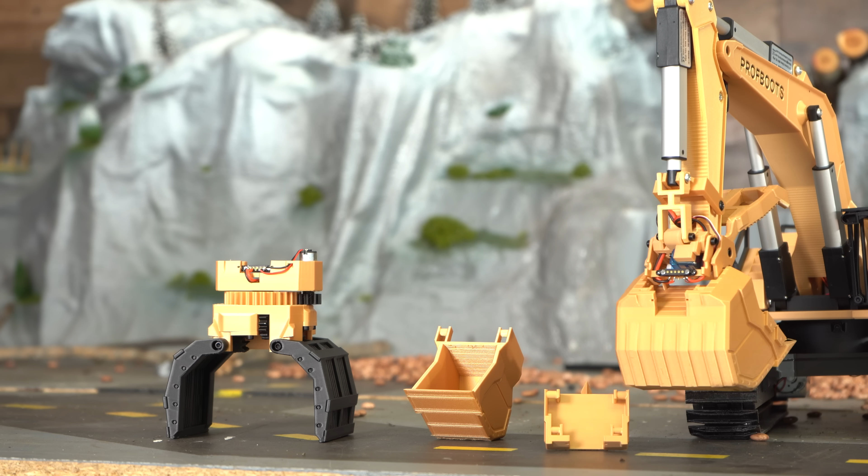Dropping the bucket and swapping over to the claw, I first thought that I was just really trash at auto coupling, or that something was broken, but after looking at it, I realized I just forgot to remove these supports in the back. With those out, I hooked up no problem.

This claw has the potential to be really, really cool. Picking up and spinning the trenching bucket gives you an idea on just how precise you could be. Unfortunately, all of my controls were backwards and in opposite order, so that really made my life difficult.

Despite that, I did try moving some sticks around, and by about the third stick, I was again having some issues with the claw, so I decided enough was enough, and that it's once again going to need a total overhaul.

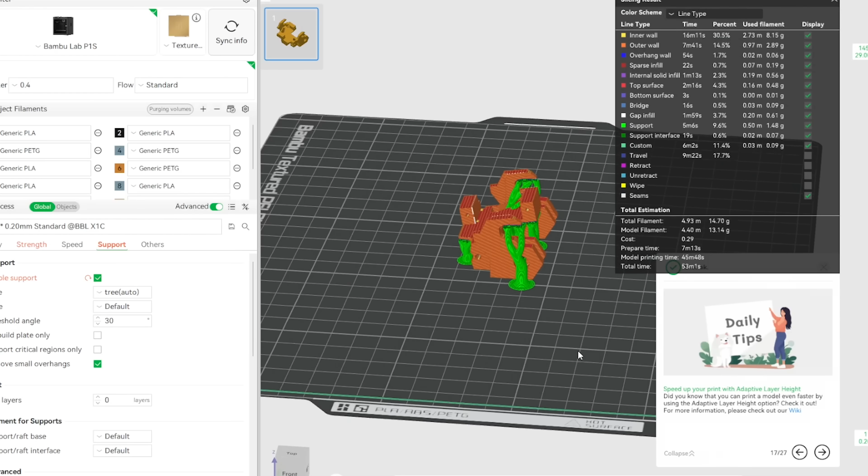The Ripper though, that I was excited to try. But unfortunately, it was a short-lived experience. This coupling plate is just not strong enough when printed in this orientation, especially with how much force is coming from these push rods. The weakest point of any 3D print is the layer lines themselves.

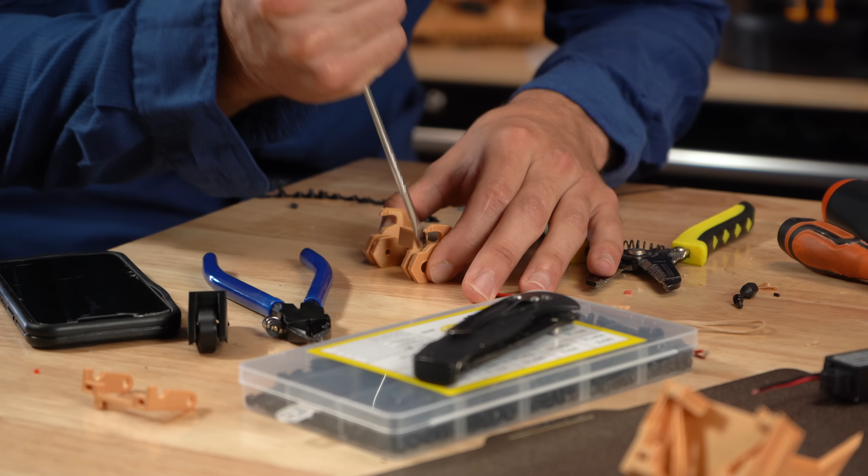Without splitting this one piece into at least 3 separate parts, I decided to just try printing it on its side. The layer lines will now run with the incoming force, making it as strong as it could possibly be. The downside though is that the support material can be a bit of a pain to remove, but the results are 100% worth it. I absolutely cranked on these attachments trying to cut this cardboard, and it didn't even budge.

Plus, by working the Ripper back and forth, I was able to cut a nice groove. If you don't think that's impressive, I highly encourage you to try cutting through some cardboard with a dull 1/8 inch piece of anything like I'm doing here. It actually takes a lot more force than you think.

Applying the Ripper to a more real-world scenario, I took it out to a creek and used it to break up some rocks and mud, which it excelled at. Unfortunately, I failed to record the bucket going in after and scooping it up, but I instead did capture this dredging footage, which honestly, I could watch all day.

This is the kind of stuff that just makes me love building and using these RCs. I could spend literal hours dredging up mud and rocks. It just kind of takes your mind off things and you kind of stumble upon little side missions and quests. For instance, moving this stick further out into the water. Then maybe you go back to dredging mud for a bit, but then you decide you actually want to pick that stick back up again and take it for a little adventure, which I did.

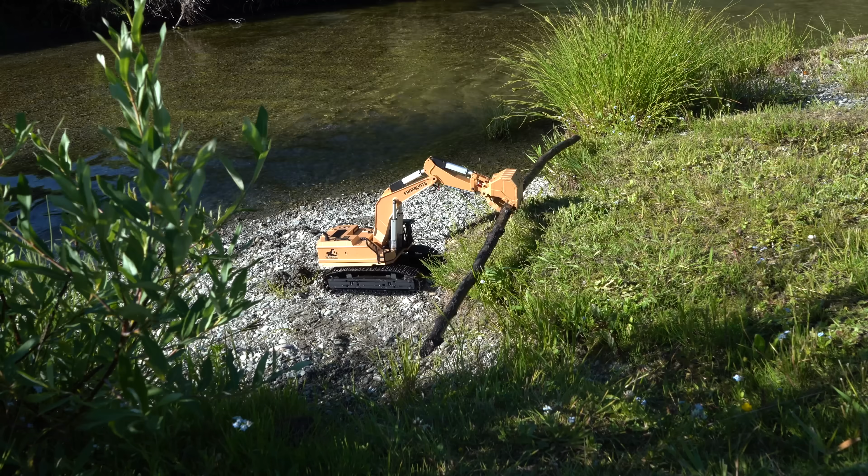At this point, the excavator was holding up really well, which was honestly a bit surprising, as usually when I'm performing these first initial real-world tests, stuff either breaks or I realize there's not enough usable power. But not with this, it just kept on cruising, and to really prove that point, I decided to do a long stress test by driving out to this little island and just dredging up rocks and dirt for an extended period.

After a while, my batteries still showed no signs of dying, so I handed the controller over to a buddy and had him try it out. Now with over 8 different controls to figure out, this can be a pretty tall order for somebody new. But he's operated excavators before in real life, as well as past models of mine, so in pretty much no time at all, he was scooping mud and trying to pick up sticks on the shore.

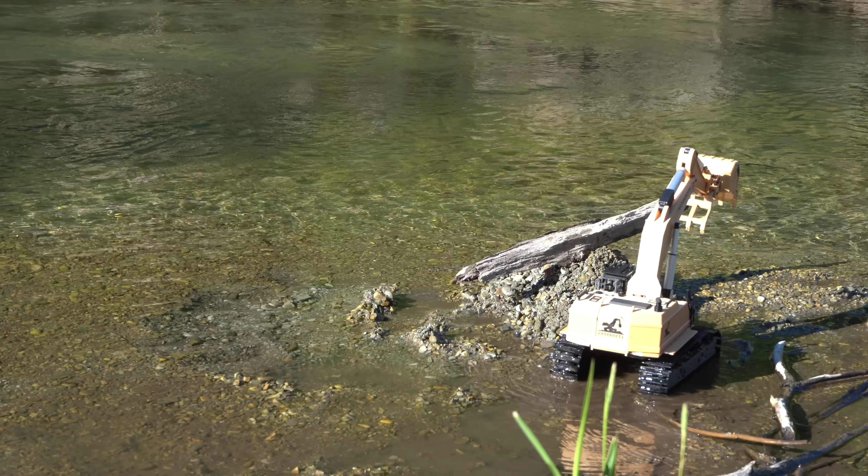One thing that did really become evident though, is that the crossover between the controls on each stick is hard to avoid unless you keep it dead centered along its axis. So I think I'll code in a bit more of a gap so that when you're just trying to curl the bucket in, you're not also accidentally moving the boom up.

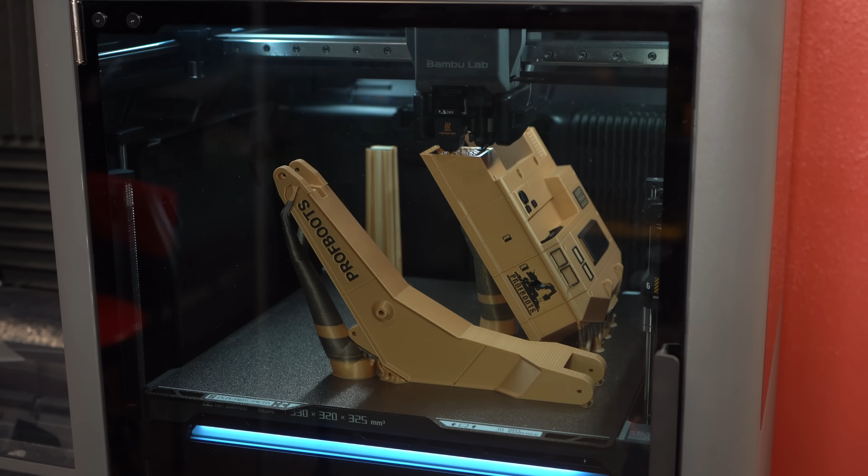At this point, I printed off everything for a second excavator so that I could really see all the changes that had been made come together. I'll be making this one with standard RC components so as to be controlled by this RC transmitter.

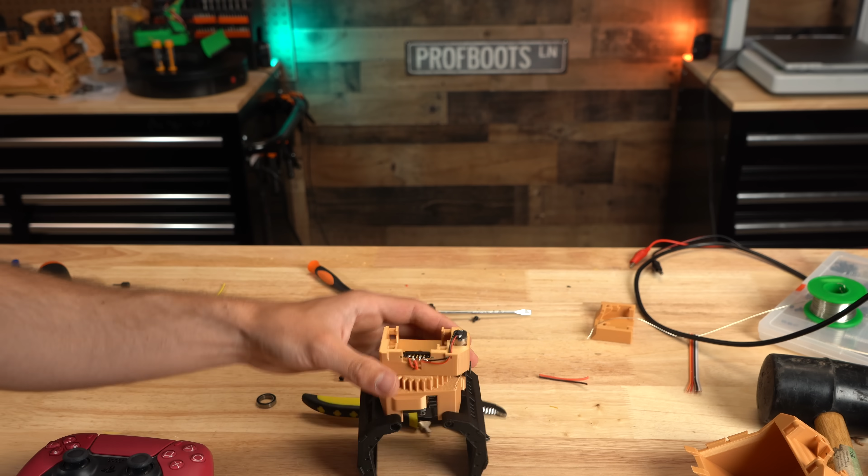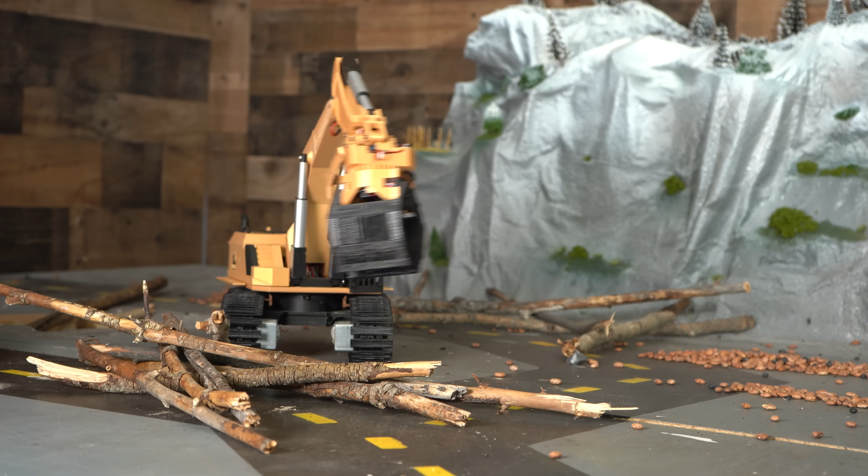Now, one final thing that's been really driving me up the wall is the claw. I ultimately just decided to swap the N20 motors out for this 20 kilogram servo. Not only will it have way more power, but it'll also hold its position and not loosen or backdrive when squeezing or clamping down on something, which was exactly the change I needed to make in order to start successfully stacking log decks and recovering some stuck equipment. I couldn't be happier with how it turned out.

Alright, my main goal for this project was to make something that could be used in the sand and dirt. And there's no better way to actually test that than recruiting the boys and rolling up to the beach in style.

All jokes aside, my brother, uncle, and I were legitimately entertained for hours. Particularly my brother - we share the same brain, so toy RC equipment also very much triggers his dopamine receptors. Things started off by digging this piece of driftwood up out of the sand, but then devolved into a fight on whose it actually was.

Then of course, we loaded the side dump on the RC semi and dumped it over this cliff, which got us thinking that building a ramp down to the water seemed like a fun idea, so everybody migrated in that direction. The sand over here was way tougher as the water had turned it into more of a hard pack, and while it was possible to get some sand if you scooped shallow enough, the real ticket ended up being one person swapping over to the ripper, loosening up the material while the other came at it with the bucket.

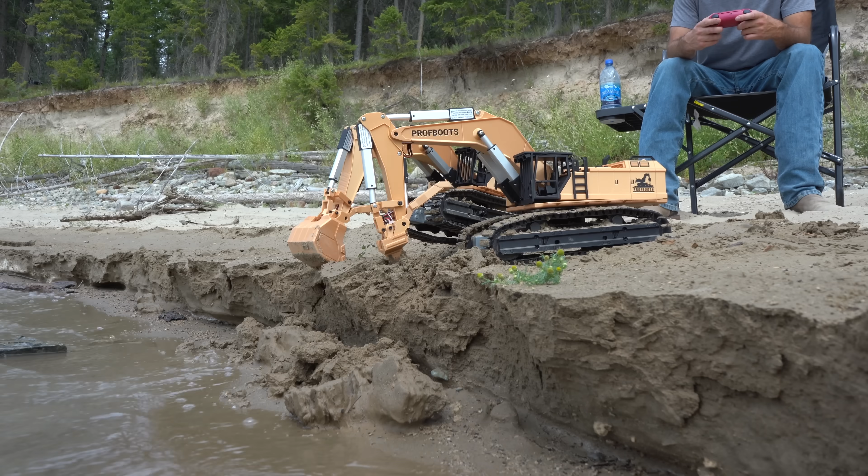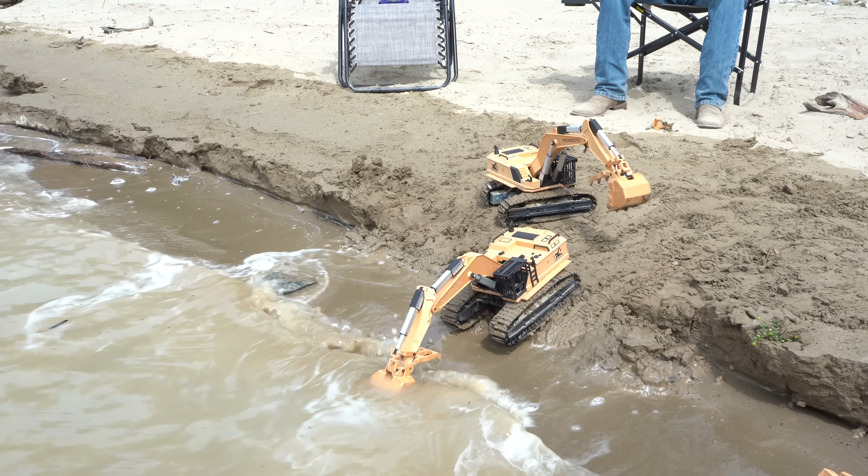This allowed us to slowly chip away at the ledge, plus adding the dozer into the mix was great for pushing in excess material. After about 15 minutes of work, we did successfully make our way down to the water, where we then debated on whether or not to start building some kind of seawall to hold back the water, but unfortunately we had to get going, and that pretty much concludes our beach day, which I'm calling a huge success.